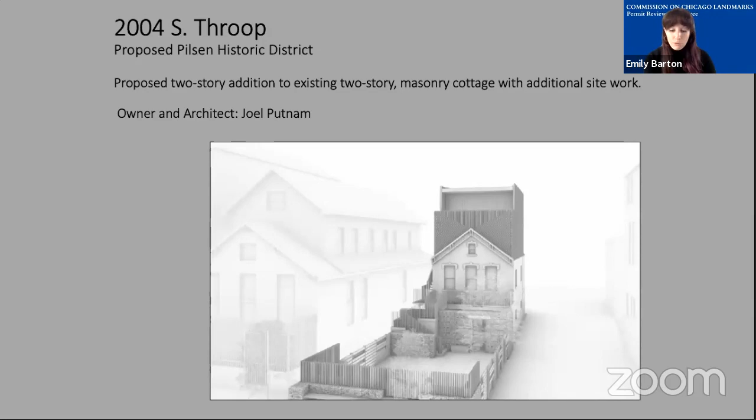So the subject building is a masonry workers' cottage on a 100-foot deep lot. The cottage is set back approximately 60 feet from the front property line and has no rear yard setback. Currently, there are 13 other buildings within the proposed district with a substantial front setback, all of them cottages. In the district designation report, these 13 buildings, along with the subject property, were categorized preliminarily as contributing structures, but that is strictly a preliminary determination by staff, non-binding to the commission.

Pending the final designation of the proposed Pilsen district, the commission intends to draft and adopt design guidelines specific to the district to address the unique characteristics and challenges predominantly found there. We acknowledge the difficulty of trying to expand properties such as this one. At this time, however, staff is only able to evaluate the proposed project pursuant to the Commission's general guidelines and

the U.S. Secretary of the Interior Standards for Rehabilitation. Staff was able to locate a building permit issued on August 16th, 1887 for this address. The 1914 Sanborn map shows a 1-story building with basement in the same location as the current cottage. The 1950 Sanborn map shows a building of the exact same dimensions, materials, and Sanborn notations as the building on

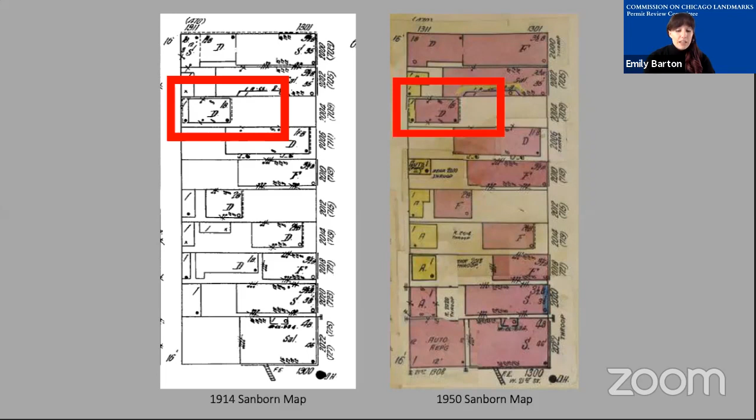the 1914 map, at the rear of the lot. Based on this information, staff believes that the current building was constructed in 1887 and retains its overall scale, footprint, and location on the lot.

As a reminder, the significant features outlined in the final district recommendation are all exterior elevations, including roof lines of buildings visible from the public rights of way. In this case, that primarily means the front elevation and the gable roof line.

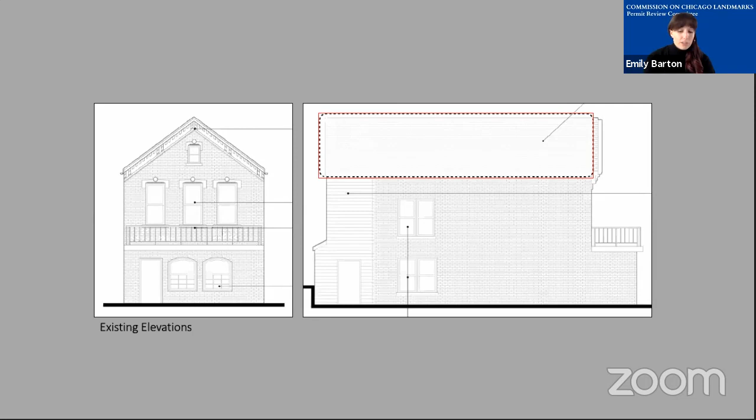The proposed project includes the removal of the existing roof and construction of an approximately 21-foot tall rooftop addition. This would nearly double the height of the existing cottage to approximately 40 feet tall and would be located directly behind the existing brick facade and cornice detailing.

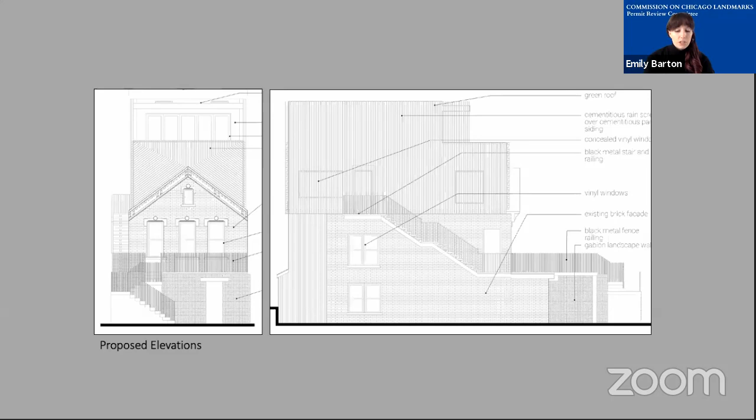This addition is proposed to be constructed primarily of cementitious panel siding covered with a cementitious slatted rain screen. The fourth floor has an 11-foot 4-inch setback and is proposed to be clad in cedar siding. In addition to removing the roof of the existing building, staff assumes that substantial other structural modification will be required to construct the proposed addition atop an 1887 brick cottage.

Here you can see the first and second floor would house 2 rental units, while the upper 2 floors will serve as a home to the applicant. We understand that this proposal also requires either approval from the Zoning Board of Appeals or a rezoning.

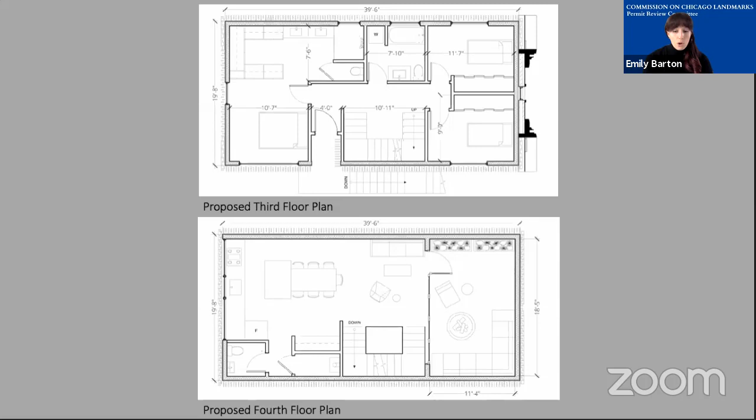The proposed change to the historic building and its roofline, resulting from the substantial structural demolition and construction of the large visible rooftop addition, would destroy the significant historic and architectural features of the building and have an adverse effect on the property and district.

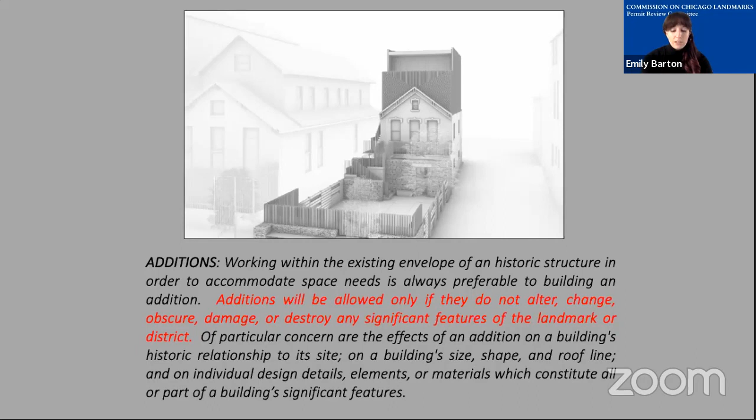It's also contrary to the Commission's guidelines on additions, which state that working within the existing envelope of a historic structure in order to accommodate space needs is always preferable to building an addition. Additions will be allowed only if they do not alter, change, obscure, damage, or destroy any significant features of the landmark or district. Of particular concern are the effects of an addition on a building's historic relationship to its site, on a building's size, shape, and roofline, and on individual design details, elements, or materials which constitute all or part of a building's significant features.

The proposed project would also be contrary to standards 9 and 10 of the U.S. Secretary of the Interior Standards for Rehabilitation, which state that new additions shall not destroy historic materials, shall be compatible in design, and shall be undertaken in such a manner that if removed in the future, the essential form and integrity of the property would remain.

The alteration of the historic roofline and the highly visible addition would destroy character-defining features of the property. Staff believes that the new addition, while differentiated, is not compatible with the massing, size, or scale of the historic cottage. And because the roof is proposed to be removed, if this addition were removed in the future, the essential form and integrity of the property would be impaired.

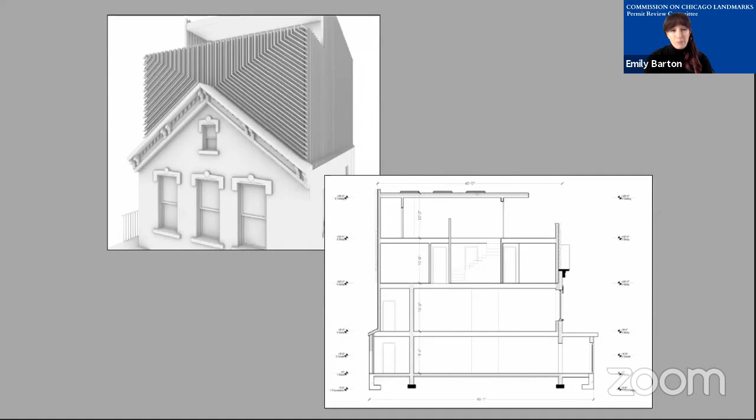Along with the proposed rooftop addition, the applicant is proposing to add a visible solid front stair to the east and south facades and renovate an existing rooftop deck to the top of the non-historic portion of the first floor.

The stair and deck will both be surrounded by a black metal fence railing. Staff recommends that the solid stair should not be approved, as it obscures the cottage facade and is not compatible with the historic and architectural features of the district.

The applicant is also proposing site work in the large front yard of the property: a 9-foot 4-inch tall gabion landscape wall, which is a wirework container filled with rock, broken concrete, or other material, proposed in front of the cottage, which acts as a screen to block the first floor from view and runs nearly the entire width of the approximately 25-foot lot.

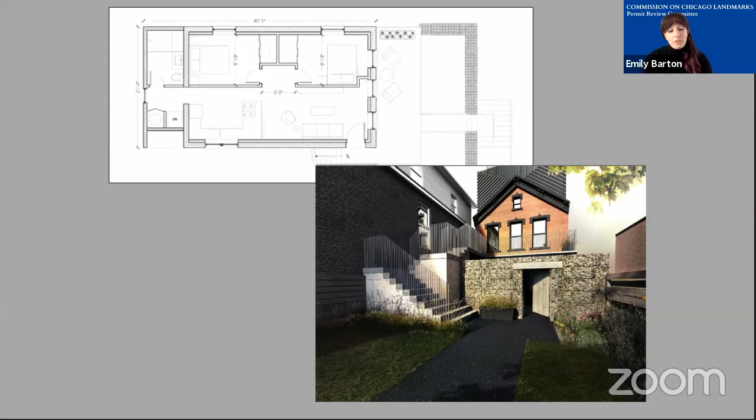A metal fence. Staff recommends that this element obscures historic features of the cottage and is not compatible with the architectural and historic features of the property and district.

So that brings us to our staff recommendations. Staff recommends that the committee find that the proposed project to construct a 2-story addition atop the existing historic building and other proposed alterations does not meet the criteria set forth in the commission's rules and regulations, the commission's guidelines for alterations to historic buildings and new construction, and standards 1, 2, 5, 9, and 10 of the U.S. Secretary of the Interior Standards for Rehabilitation of Historic Buildings.

Therefore, the project would have an adverse effect on the significant historical and architectural features of the proposed property and district. Staff further recommends that the committee advise the applicant consider alternative options to rehabilitate the property that would not destroy and adversely impact the roof line and other historic features of the building, such as a smaller, less visible rooftop addition set back from the front facade.

Pending the final designation of the proposed Pilsen Historic District, the commission intends to draft and adopt design guidelines specific to the district, which address its unique characteristics and challenges. These guidelines should evaluate properties where existing structures are built towards the rear, such that additional options may be considered to accommodate further development of the property.

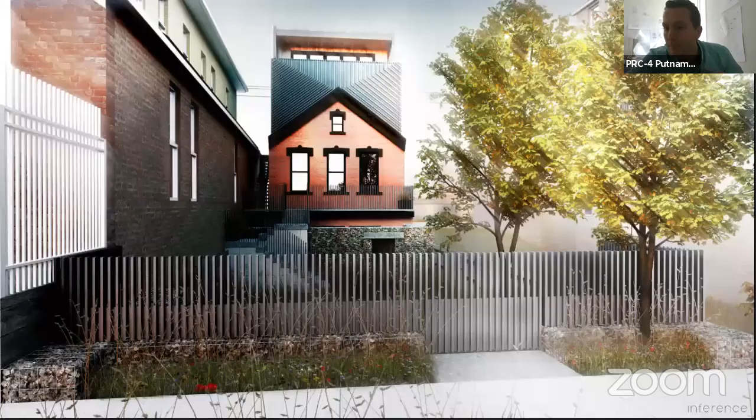In November of 2017, Catherine and I purchased property with the intention to undertake some form of major construction project. Our goal, among them having a long-term family home, has been and will continue to be to maximize the zoning allowances for our property, as well as introducing as many rental units as possible.

Pilsen's facing a housing shortage. Much of the US is facing a housing shortage.

At that time, we reached out to the previous alderman's office, as any work would and will need to go before the zoning department. Alderman Solis's instructions to us were that everyone involved needed to make money, and that because it was an election year, we would need to wait for him to win an election, because he did not want to anger any voters by taking our project to the zoning board. Thankfully, he didn't win. However, shortly after the election, we received a notice of the proposal for the historic district.

And along with attempting to install a city water meter, we have effectively been stuck in a bureaucratic nightmare coming up on 3 years now.

Catherine and I take issue with the CCL staff statement that we're adding 2 stories, when in fact we're only adding 1. We're proposing that the current 3rd floor attic, which is enclosed interior and conditioned space, which prior to our ownership was used as a bedroom, be adjusted to have a continuous full height ceiling.

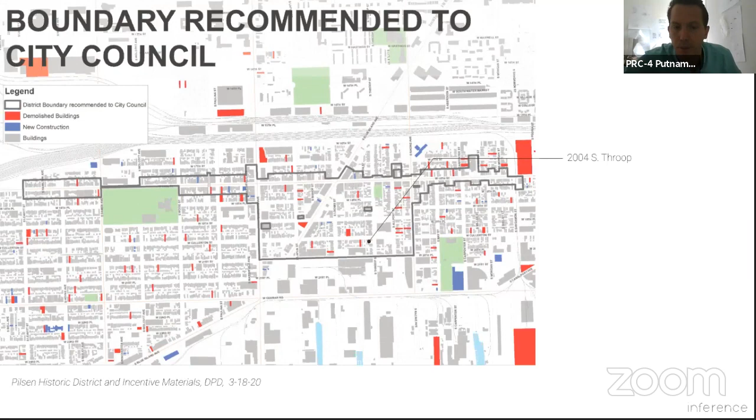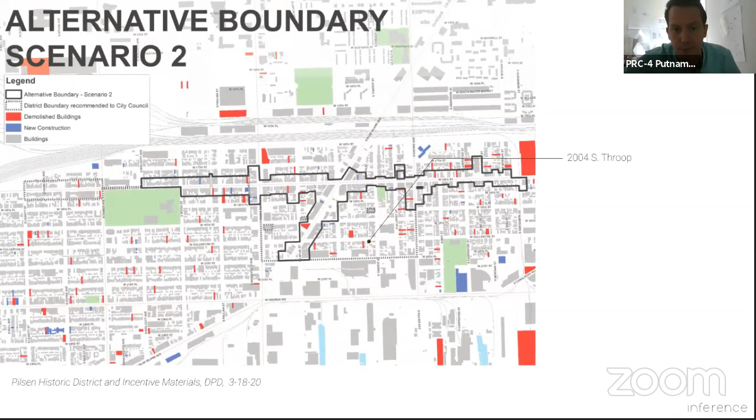Next slide, please. This is another scenario also showing that our house is not in what would potentially be the district.

Through their revised recommendations, the Department of Planning and Development, and the Bureau of Planning, Historic Preservation, and Sustainability have effectively concluded that our house isn't historic. Why would they make revised presentations if our house is historic? Clearly this is an issue that is difficult to even determine where the boundaries are, so we do take issue with the strict, stringent standards being imposed upon us.

Next slide, please. So they acknowledge, and Emily graciously did acknowledge that this is difficult. We've been stuck for several years now, and are simply coming to you because we're trying to move the process along for ourselves, but also for others.

But we're repeatedly told that when it passes, guidelines will be put in place. When it passes, this is a blank check. No one would vote on a law that they didn't have in place or didn't understand before it was even written down, yet this is what we're being asked to do.

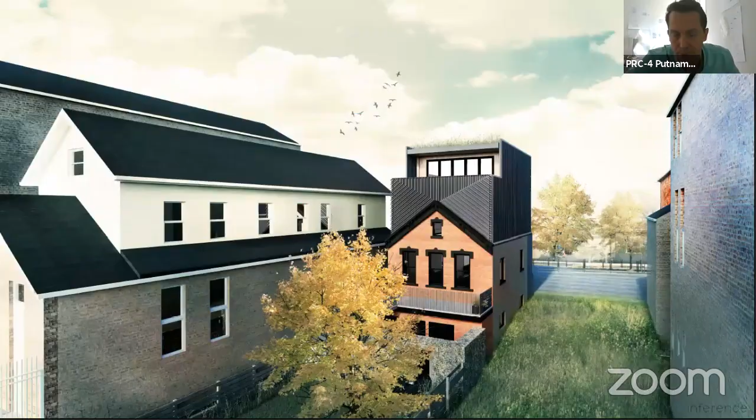Next slide, please. So I want to go through one by one and just talk about each of these.

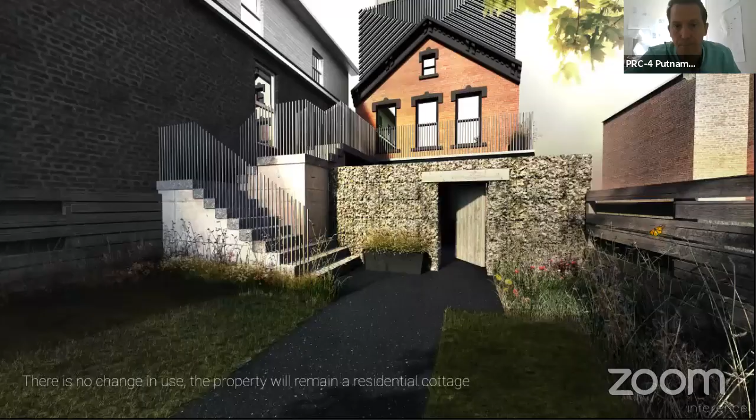So this says that one of the points being made is that we're not using it for its historic purpose. Next slide, please. It will continue to be a home, a workers' cottage.

Next slide, please. The historic character shall be retained and preserved. The removal of historic materials, features, and spaces that characterize the property shall be avoided.

As Emily said, there's an existing brick addition in the front. We're proposing that we screen that through the use of gabions, and the screen is not to screen the building—the portion being obscured is already an addition that is not 'historic'—but to blend the staircase into the building. Most of the time, when you walk through Pilsen, homes set back like this have rather ugly stairs in front. We're trying to find a way to incorporate the stairs into the design of the building in a pleasing way.

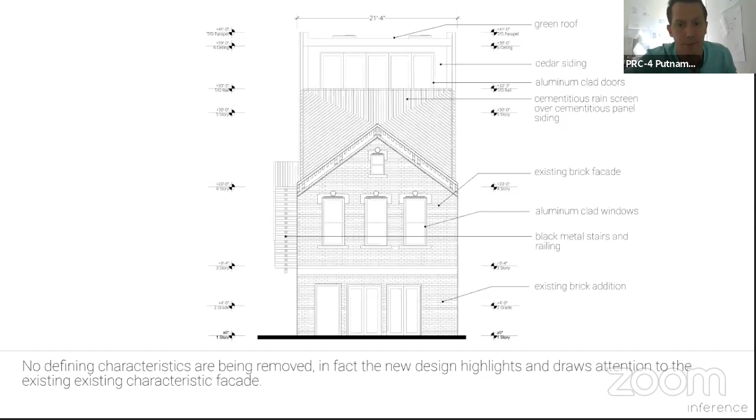Next slide, please. Distinctive features, finishes, construction techniques, or examples of craftsmanship that characterize the property shall be preserved. Next slide, please.

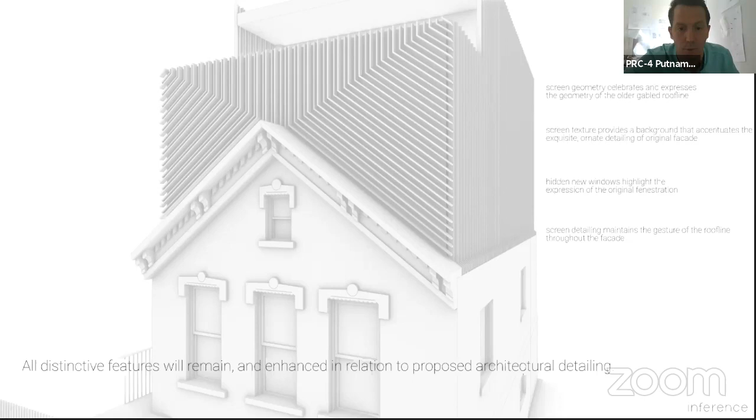We actually feel that we're preserving the distinctive character. It is an old shake roof. Yes, we acknowledge that we're adding to that, but we're celebrating that original design and drawing attention to the most unique features of the home: the cornice, the brickwork, the rose carvings above the window.

Next slide, please. New additions, exterior alterations, or related construction shall not destroy historic materials in such a way. New work shall be differentiated. Next slide, please.

I can't imagine how it's any different—our work is completely different, I acknowledge that. We're not destroying any defining characteristics. The addition has been specifically designed and detailed to be distinct yet harmonious. All new windows and doors will be hidden from view, which will affect the quality of the light in our home, but we think that adding punch windows everywhere would actually detract from the beauty of the old home.

Next slide, please. New additions and adjacent or related new construction shall be undertaken in such a manner that if removed in the future, the essential form and integrity of the historic property and its environment would be unimpaired.

Next slide, please. Emily stated that we would be placing the addition on top of the existing brick structure. That's not true—the brick structure is crumbling and falling down. It would not hold an addition. Furthermore, there are no interior walls; it's lath and plaster over the existing brick. There's no insulation, so we need to provide space for insulation, new plumbing, and new electrical. In addition, we're planning to completely pour new foundations and restructure the entire building internally.

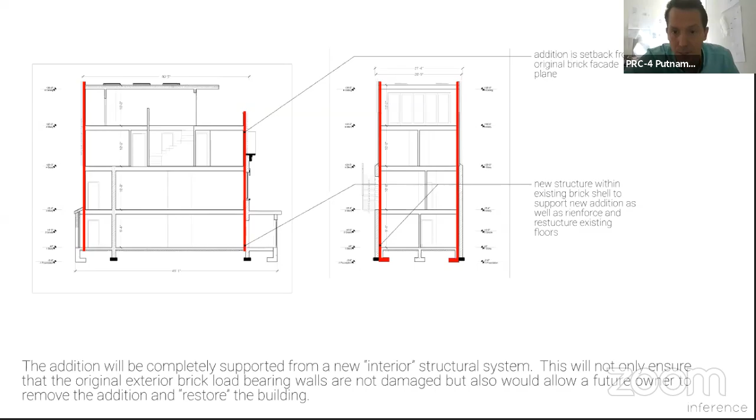So, as I said, we've gone around and we've talked to our neighbors. Everyone loves this. They actually tell us to demolish it. Here's one, is that they welcome positive change. They think it's positive change.

Miguel, he's a good friend. He also doesn't understand why they can't think that this would be a good thing for the community. Miguel owns the building down the street.

Lalo is actually extremely worried about the designation because if strict rules are in place, he may be forced to sell his building. He's lived here 40 years. And he loves what we're doing. He actually told me to demolish it because he thinks it's an eyesore.

Here's one where they think that all of the change is good, not negative. I mean, I don't want to go through all of these one by one, but I think it's important that we hear from the community.

And so Jonathan did send in a letter. As I said, he worked with us. After our initial meetings with staff, I took a step back. I'm an architect, I'm not a preservationist. So I called Jonathan, I asked him to come to the house, walk through it. I showed him our proposal. And we spent days in charrettes arguing over what we thought was appropriate, ultimately arriving at what we've come here with.

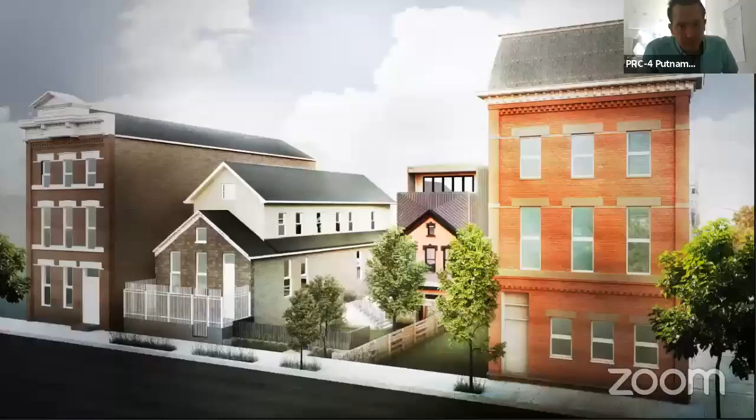The City Council will soon vote on the final outcome of the proposed historic district proposal. The vote very well could end up being a no. And even if it does pass, it would more than likely pass one of the currently proposed alternate boundaries, effectively making our home a non-historic structure. At such time, we would have no clear path forward. We could potentially be required to seek a demolition permit to achieve our needs for the property.

As it stands now, the building currently doesn't conform to any zoning code. Although we recognize that we could continue with this plan and argue for a variance, any new work may need to be the result of strict compliance with zoning ordinances, meaning a new building in the front and parking in the rear. It is our hope that with your support, we can save this structure, but clearly without it, we simply may not be able to.

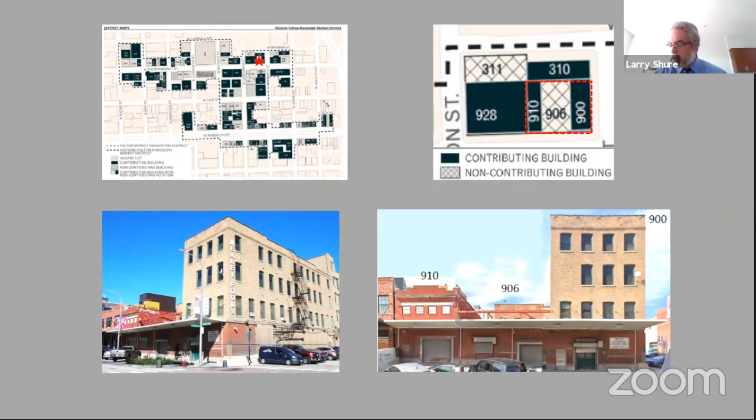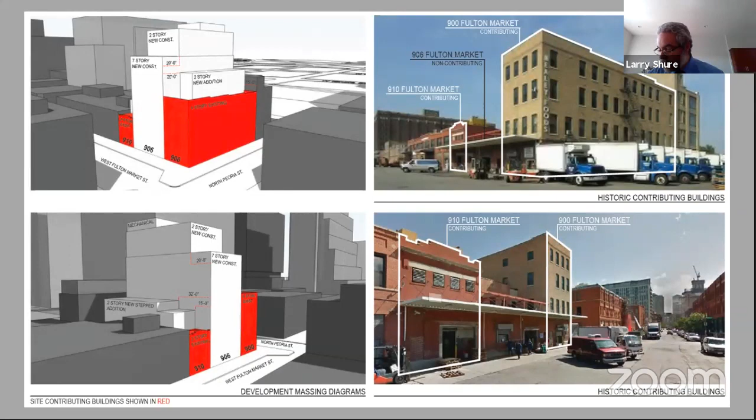Let's go to the next slide. So as you mentioned, the project includes facade restoration and rooftop additions for 900 West Fulton Market and 910 West Fulton Market, both of which were preliminarily identified as contributing. A proposed new 7-story infill construction is intended to replace 906 Fulton Market, the building in the middle. Although these 3 buildings were constructed separately, they have been used as a single complex since at least 1916. The proposal also intends to use these buildings together while maintaining their individual characteristics. In order to accomplish this, this project will require a foundation in common for the entire site, which will result in partial demolition and replacement of the structural systems of the historic building. A similar proposal was approved by the Commission at 1100 West Fulton Market, which maintained a portion of the historic building and then connected to adjacent new construction.

So let's go to the next slide here. We got a lot of slides.

So what we want to talk about first is the determination of whether 906 Fulton Market is contributing or non-contributing. As you know, the report provides a preliminary recommendation, but when someone actually proposes demolition, staff takes a closer look at the individual criteria that allows us to determine if a building is contributing or non-contributing.

I'm not going to go into enormous detail for all this criteria, although I do want to note that your designation report does have all that information if you would like to take a closer look. Criteria 1 and 2 relate to whether the property exhibits the general historic and architectural features as described in the designation ordinance, and those features are generally corbelled brick, cast iron details, elaborate parapets, things along that nature.

It's our recommendation that this building really doesn't exhibit those significant criteria as identified in that ordinance. It's a fairly utilitarian building. It actually consists of two different buildings, in my opinion: the 2-story building, which you can see in this photo, and then kind of a 1-story building that was wrapped around that to create these loading docks along Fulton Market.

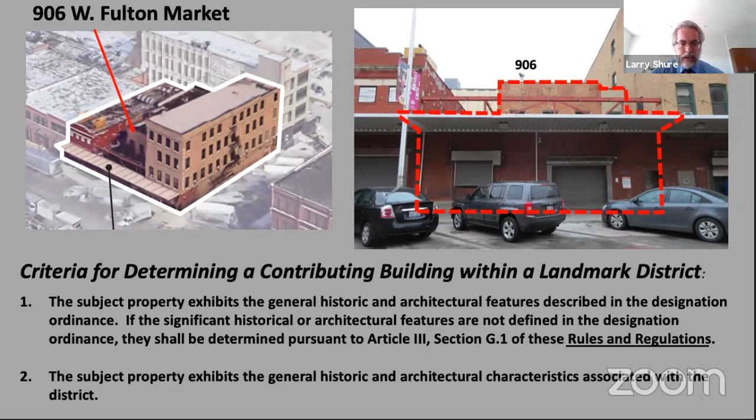Let's go to some more of the criteria on the next slide. So criteria 3, 4, and 5 relate to the general characteristics of buildings within the district. This building does respect the general site characteristics. It does maintain the street wall, and it is consistent with the general scale associated with the district, as well as the materials utilized in the district.

However, the building does exhibit a number of alterations, including a loss of height, whether it's 1 floor or 2, that you can see in the photo of that 2-story building. At some point it lost a floor, and you can still see the different brick that was used to repair that. I also want to mention that although we do have some information about the building, we were not able to identify the original building permit, so we don't really know who designed it or when precisely it was constructed. We're estimating it was built about 1906, but it's difficult to say for sure.

So we are recommending that the commission find this as non-contributing, which would allow it to be demolished and replaced with the proposed infill construction. Let's go to the next slide.

So many slides. First, I'd like to talk about 900 West Fulton Market, which is that corner building. The applicant proposes to restore all window openings along Fulton Market and Peoria, installing compatible new double hung windows. The non-original storefront infill will be removed and a new compatible storefront will be inserted. These will extend up to the historic cast iron lintels, which will remain on the front elevation. Additional storefronts are proposed for the east elevation, and insertion of new storefronts is also supported by the Fulton Randolph Market design guidelines, which I hopefully included in your packet.

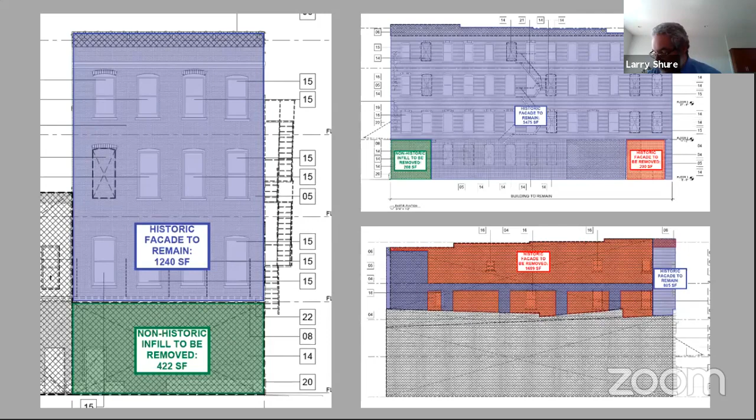Let's go to the next slide. The applicants are proposing to construct a 2-story rooftop addition on 900 Fulton Market. The proposed addition is set back 20 feet from Fulton Market and 15 from Peoria, which is in keeping with the recommended setbacks in the design guidelines for rooftop additions of buildings 4 stories or greater.

The 2-story addition is 22 feet in height, which is compatible with the floor heights of the historic building. The design of the addition utilizes a glass and metal curtain wall with dark colored mullions. The commission has previously approved of new rooftop additions with modern simplified details, which can be clearly differentiated from the historic structure.

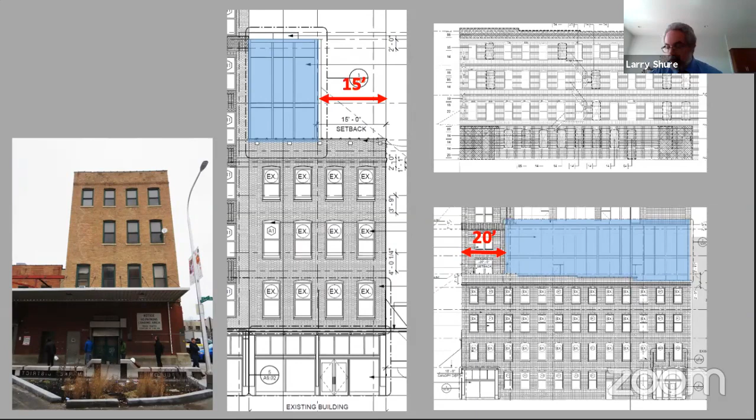Okay, moving on to the next. So this is the two-story building at 910 West Fulton Market. The primary elevation along Fulton Market has been substantially altered, including storefront infill and reduction in the size of the second floor windows. The applicant proposes to install a new compatible storefront system and restore the original window openings at the second floor with new compatible double hung windows. The front facade and parapet will be repaired as needed.

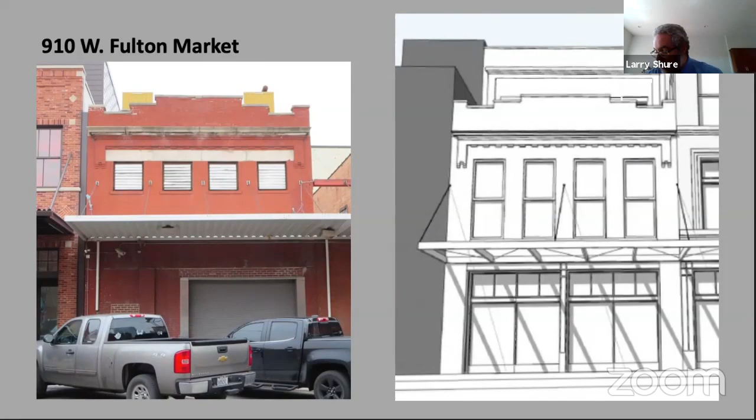However, there is a substantial amount of demolition proposed for this property, and we'll look at that a little bit more on the next slide.

According to the engineer's report, which was included in your packet, a temporary shoring system in the basement is not adequately engineered to support the weight of the building. Cracks in the first floor concrete slab and corroded rebar are visible, and the parapets are tilting outward. The report concludes that 910 West Fulton Market, except for the front facade, is not salvageable and would require replacement. The dilapidated state of the building indicates that it may not survive substantial intervention. Staff did tour the site with the applicant and agrees that the condition is fairly poor.

Let's go to the next slide. We'll talk a little bit more about this.

The applicant is proposing to retain the front facade and 7 feet of the east facade, which you see in these graphics, and those areas will be braced and retained. Due to the structural condition of the building, the remainder of the structure is proposed to be demolished and replaced with new structure.

As I mentioned, if removal equals 40% or more of the significant features, it requires approval from City Council. The applicant has provided graphics indicating what they believe are the portions of visible facade that must be removed, and they came up with a calculation that equals about 36.1%. Staff is a little concerned about this calculation because it depends on particular vantage points to determine the maximum amount of removal. So we recommended that they expand their calculations to include the entire east elevation, and if they did that, it would equal about 55% removal. We are recommending that if that is the case, this would also be approved by City Council along with that middle building.

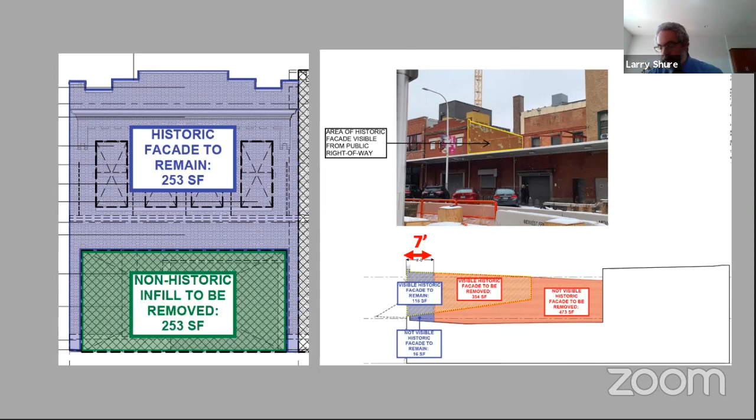Let's go to the next one, yet more exhibits.

The applicants proposed to construct a 2-story addition on the 2-story building at 910 Fulton Market. The design guidelines limit rooftop additions to 1 story for buildings which are 1 to 3 stories in height. To address this, the applicants have set back the 1-story portion of the building 15 feet from the front property line, and set back a proposed second floor 32 feet from that front property line, creating a stepped condition illustrated in the graphic to the left. Additionally, the height of the second floor is significantly less than the established historic floor heights, and the intent was to minimize the visibility of that second floor while providing enough square footage to meet the program needs of the development.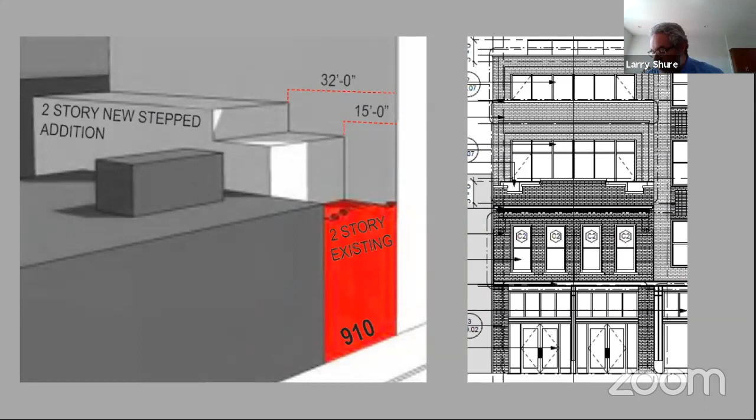The applicants did provide significant amounts of perspective renderings from a number of vantage points to illustrate that the proposal will not result in significantly more visibility than the 1-story addition recommended by the guidelines. So staff is recommending that the additional floor is adequately offset by that increased setback and that it may be approved as proposed. The design of the rooftop addition incorporates brick cladding and a simplified reference to the historic parapet details. Staff recommends that the proposed setback and massing are compatible with the intent of the design guidelines, which is to allow compatible rooftop additions which do not damage or obscure the historic character of the building.

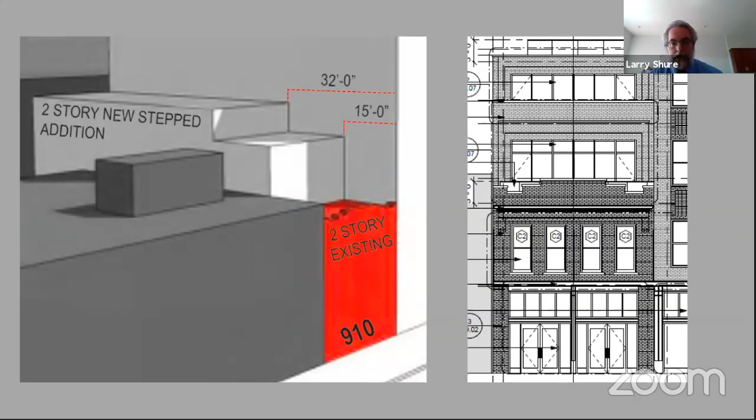Let's go to the next one.

I want to talk a bit about the proposed 9-story infill construction at the location of 906 Fulton Market. The first 7 stories of the building are about 90 feet 10 inches in height, which is compatible with the tallest contributing building in the district at 900 West Lake. The two top floors are set back 20 feet to decrease the visible mass at the front property line. The height of the top 2 stories, 22 feet, brings the total height to 114 feet. Rooftop mechanicals atop the building increase that height to approximately 123 feet.

In June of 2019, the PRC approved a new construction project at 1041, 1043 West Fulton Market. In that case, the 8-story masonry base of the building at 1043 was almost identical to the proposed height of these lower 7 floors, 90 feet, 10 inches. A glass tower was set back 20 feet from Fulton Market for a maximum height of 138 feet. In that case, the proposal covered an entire block within the district and was not immediately adjacent to any historic structures. In this case, the proposal incorporates 2 historic structures, which are significantly smaller in scale.

The proposal is also adjacent to other historic buildings on the block. The design of the proposed building utilizes masonry piers and spandrels with punched openings and paired double hung windows on the upper floors. A corbelled cornice terminates the 7-story portion of the building.

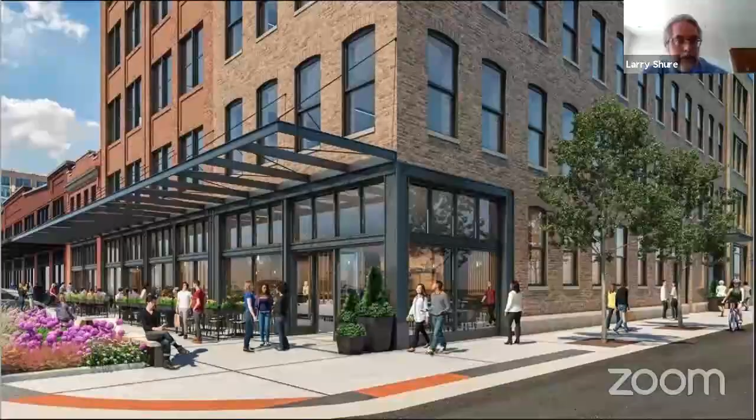In comparison. Oh, you're looking at the comparison report. Yeah, maybe we can go back a couple of slides and look at that rendering. You know what, how about 2 slides forward?

Oh, that one, perfect. Okay, so the current proposal that you're looking at here is the final submittal. The previous one, which I think was included in your packet and I don't think anyone else can see, was a slightly different proposal with a slightly different treatment of the brick and of the upper portion of the building. Staff had some concerns that the building should read as more of an individual building rather than as a building that's had an addition put onto it. And then there was some concern about breaking up the massing to be a little more compatible with the historic character of the district.

Is that what you're focusing on? Yeah, correct. I just wanted clarification on that because it significantly increased the amount of brick material, which contributes to a much more integrated aesthetic integration of the addition with the existing building in the foreground. So I just wanted to acknowledge that there was already a significant revision of this. I want to say that we've worked on this project with the applicants for about 6 months, and they've done an extraordinary job of incorporating our comments into the submittal. Yeah, I wanted to bring attention to that effort. Thank you.

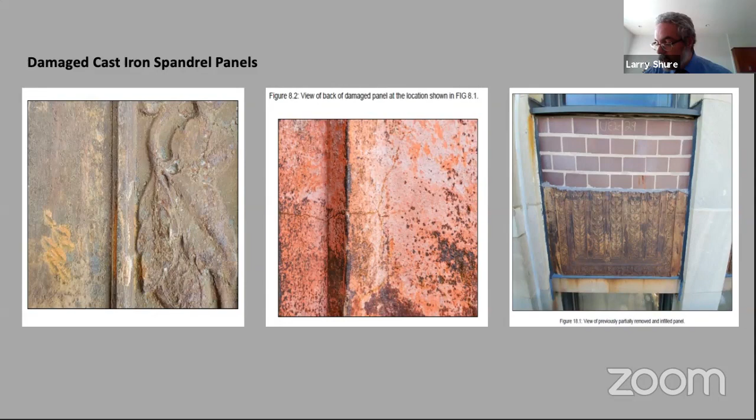A number of panels had previously been removed, some partially cut to accommodate through-wall air conditioning units, with resulting voids often infilled with dark brown brick. In some cases, visible structural repairs to the panels had been performed. Many panels have missing corners due to fractures within the material or corrosion related to the underlying steel angles. Much of this corrosion is due to failure of the perimeter spandrel sealant joints and failed paint coatings.

Based on their survey, KGH determined that more than 60% of the panels are not salvageable. This was primarily a visual survey, although some panels were removed for a more thorough inspection. In some cases, panels which appeared solid revealed fractures and hairline cracks on the back, which were not readily apparent on the front.

Here we go. The process of removal irreparably damages these cast iron panels. They appear to have been installed from the interior of the building with J-hooks prior to installation of the building's backup masonry, which was then infilled from above. They cannot be removed intact without removal of the adjacent limestone cladding or creating access through the openings in the interior walls. Attempts to remove the panels intact did result in additional fractures.

Historic preservation guidelines state that when deteriorated ornamental features cannot be repaired, they may be replaced to match the old in design, color, texture, and overall visual qualities, and where possible, materials. While cast iron or even cast aluminum would be the most appropriate from a historic standpoint, the original method of attachment requires substantial removal of limestone cladding and brick backup in order to access those backside connections necessary to support the weight of any cast metal. The applicant notes that shoring of the window assemblies might also be needed to allow reinstallation of the heavy metal panels.

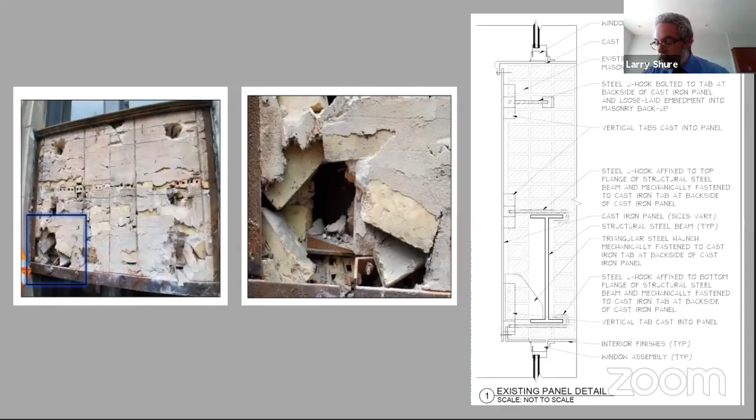Substantially adding to the complexity of the project. Rather than wholesale removal of adjacent historic materials, the applicant proposes a lighter alternative, which could be securely installed without major reconstruction. That alternative is fiber reinforced polymer. Let's go to the next slide.

The commission has approved of fiber reinforced polymer, or FRP, as a replacement material on various landmark projects. Most recently, FRP was permitted to replicate the missing terracotta cornice at 226 West Jackson. FRP has also been approved as a replacement for the Joliet limestone spire at the First Baptist Congregational Church. FRP molds can be taken from existing features, or a model can be built to replicate historic features, and a mold can be taken from that.

The current proposal represents the first request for large-scale replacement of cast iron with FRP replications. This material is relatively lightweight compared to cast metal, but the primary advantage comes from the flexibility in the connections needed to securely attach the lighter panels to the building structure. FRP panels would minimize the impact of new connections on the existing structural frame and limit the extent of backup brick masonry repair work or resetting of limestone masonry cladding. The use of FRP also reduces the risk of future catastrophic failure due to spalling or fracturing.

These cast iron spandrels begin above the 4th floor on the north elevation and the 6th floor on the east elevation, which is 45 feet and 65 feet above grade, respectively. At that height, it will be difficult to identify these as a replacement material.

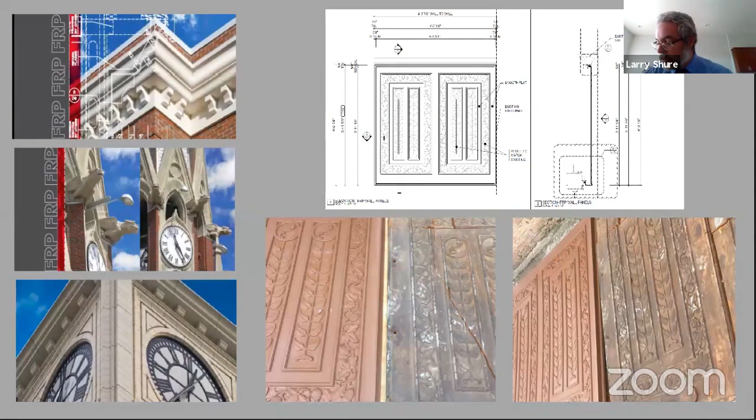Let's go to the last slide. FRP panels may be painted to match the color of cast iron spandrels. Just like cast iron, all panels are intended to be painted, which will further protect the material. The panels will need to be repainted periodically, but this is also true for cast iron. Because the color of the panels will greatly impact the appearance of the building, staff recommends that the historic color be investigated by a qualified expert and that the permit plans incorporate their recommendation into the color choice, subject to staff review and approval. We are recommending approval with those two conditions.

That concludes my presentation. If you have questions for me, and I know that the applicants are on the call as well.

Thank you, Larry. Does the committee have any questions of Larry at this time?

It's a great building. I used to have my office there, and then Millennium Park got built and rent got too high. Anyway, okay, wonderful.

The applicant is here. They want to say anything?

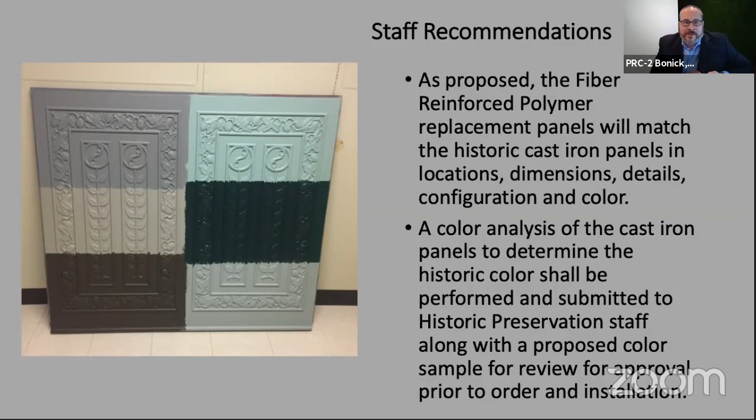Hi, yes, this is Mike Bonick from Kellermeyer Gottfried Hart. I'm the architect and engineer on the project. I think Larry summarized things really well. I just want to start by saying thanks to Larry and the staff for their help and all their time along the way. Also for Ward Miller and his comments at the start of the call.

Larry summarized things really well. I think the issue I really want to hone in on is that as a professional and expert with these materials, KGH can't recommend salvaging any of the panels, not even one of them, in our opinion, based on the way they're attached and the inherent brittleness of the material. We haven't been able to review the backside of all these panels, but those that we have, we're finding deficiencies that aren't detectable from the outside.

We've also worked with a couple of laboratories to try to determine other testing methods to find any panels, or find any testing method that doesn't require removal of the panels and can accurately detect all the deficiencies. The problem is, most importantly, that when there's a crack in a panel, a deficiency, the result is something that falls to the sidewalk. So there's really no in between, and it's usually not detectable to find that pattern when it's actually going to happen. So there's nothing we can do ahead of time to identify these deficiencies and prevent them.

I do want to mention that we got a letter of support for this project, both from the alderman and from the community group. I don't think we received those in time to go in your packet, but I believe they were posted on the commission website. As mentioned, this is a new mixed-use 4-story masonry building with roof deck and attached rear garage with roof deck. The Armitage Halsted Historic District was designated in 2003 and contains one of Chicago's finest intact collections of small-scale 19th century commercial architecture.

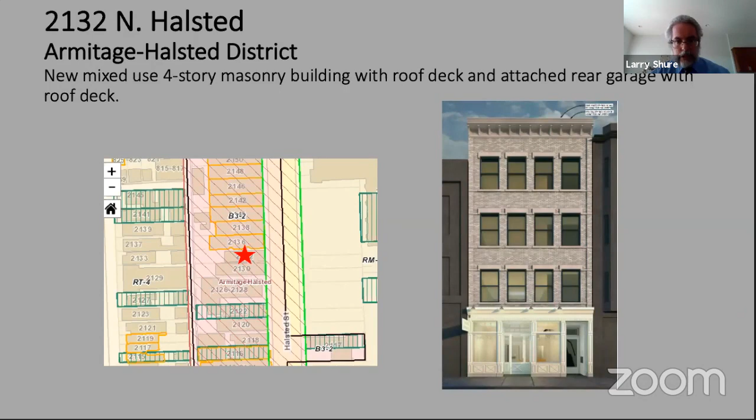Some of you commissioners may recall that the commission approved a demolition of a non-contributing building on this same site back in 2019, and this structure is the proposed replacement. I believe that was a 1-story building that had been a liquor store for a long time. So let's go to the next slide.

As we do for all proposed infill construction, we request that the applicant provide streetscapes and site block plans so that we can look at the proposed building and determine if it's compatible with the existing characteristics of adjacent buildings. In this case, the building is maintaining the existing street wall, and it also has a 0 lot line condition, which is consistent with the historic buildings as well. Additionally, the height is quite compatible with the other historic buildings up and down that block.

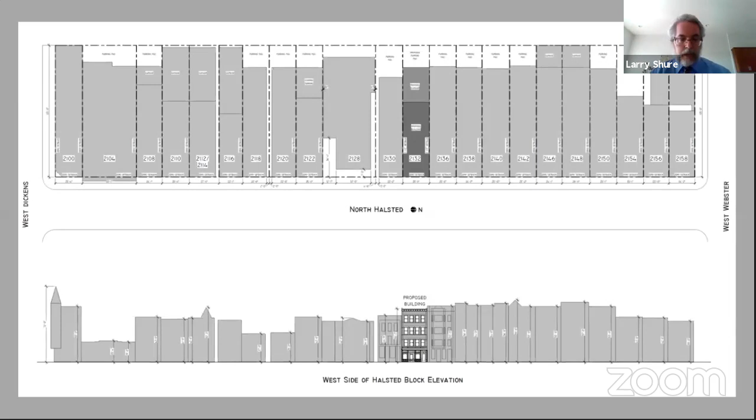We've got one more streetscape. Let's go to the next slide. The applicant provided a rendering of the proposed building just to show how it relates to the adjacent construction in regard to color, material, and overall look and feel.

Let's go to the next slide. The proposed 4-story building incorporates punched window openings, a first floor storefront, and a projecting cornice at the front parapet. The floor heights and window sizes are compatible with the adjacent historic buildings, particularly the building to the north.

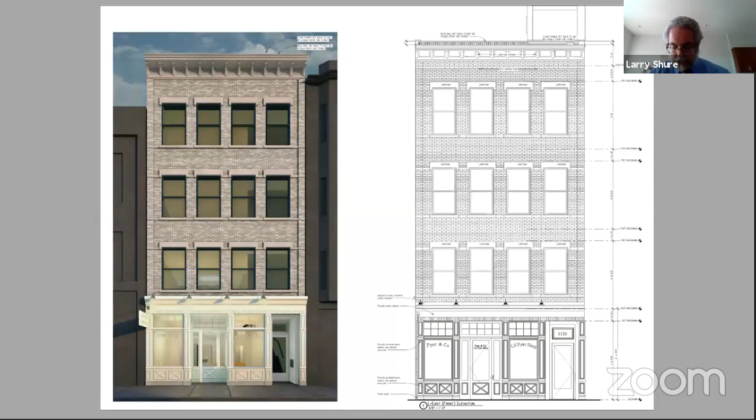Let's go to the next slide. Moving right along, the storefront spans the height of the first floor and utilizes transom windows with divided lights and decorative bulkhead panels. This is compatible with the adjacent historic storefronts.

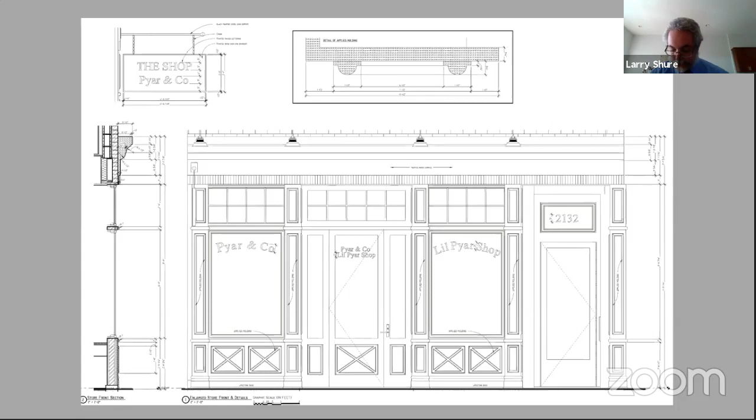Applicants have also shown proposed signage on this submittal, including 3-inch and 6-inch high letters attached to the storefront windows and a non-illuminated blade sign about 2 feet in height and 4.5 feet in length. Staff recommends that the signage be approved in concept, and signage details shall be reviewed and approved with the sign permit applications. Let's move on to the side elevations.

They are proposing to construct a rooftop stair enclosure to provide access to a roof deck. This enclosure is set back from the front facade 16.5 feet. It's about 8 feet in width, and it projects above the front parapet by approximately 5 feet. The stair enclosure utilizes a sloped roof to match the slope of the stairs in order to decrease its visibility.

The stair enclosure will have a dark, non-reflective fiber cement cladding. The metal railing for that roof deck is set back about 5.5 feet and projects only about 6 inches above the front parapet and will not be visible from the public right-of-way.

I also want to mention that what the applicants have proposed is a brick wrap around the sides of that building to screen any views there might be of the proposed concrete masonry units, which they're utilizing for the non-visible elevations. They've also shown face brick for the south parapet of the area of the building that contains that roof deck. The CMU is proposed to have an integral color to match the color of that face brick.

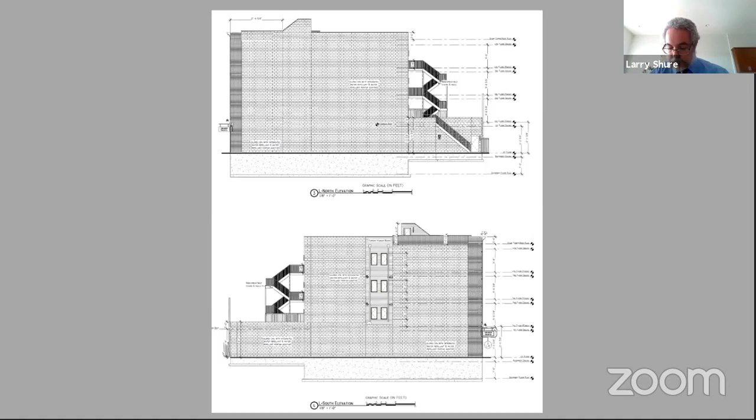Let's go to the next one where they provided some product information and colors and textures of what they would like to use. Obviously, this is the point in the meeting when I would pass around a material board, which sadly I can't do. So these are the proposed materials, the limestone and brick, and staff is recommending approval of these as well.

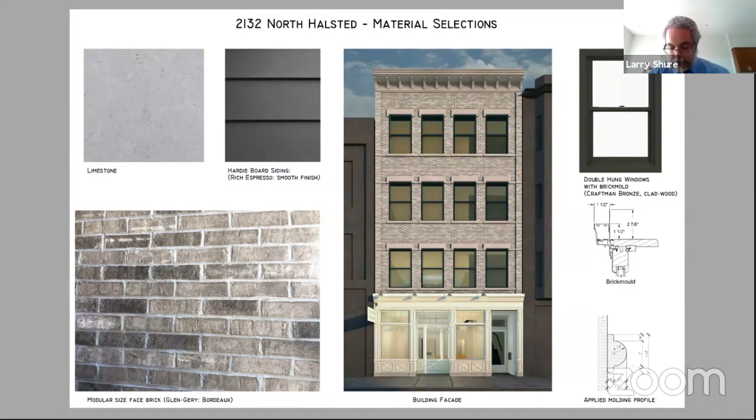Let's just go to the last slide. This is our recommended conditions of approval, which I pretty much touched on, and they're mostly proposed anyway. That kind of is it for this. If you guys have questions about my presentation, I'd be glad to address those. I believe the applicants are here as well.

Thanks so much, Larry. Does the committee have any questions of Larry at this time? Everything's clear, seems to be pretty good here. The applicant is here if you'd like to make a statement.

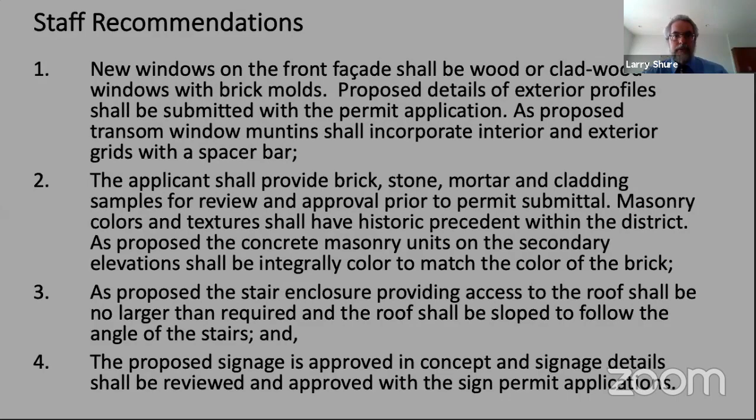Hi, can everyone hear me? Yes. Oh, okay. Just wanted to thank the committee for working through this process with us. We appreciate all the conversations. A lot of people put a lot of time into this process, so just wanted to thank everyone for their time and appreciate the help.

Thank you. Does the committee have any questions for the owner? Seeing none, okay, let me call for a motion to approve the staff recommendations. Anybody want to move? So moved. Commissioner Jakiewicz, and a second. Second by Osmond.

Commissioner Hughes. Yes. Commissioner Aguirre. Yes. Commissioner Jakiewicz. Yes. Commissioner Osmond. Yes. And I'm in favor as well, Commissioner Wong. The motion carries unanimously. All right, good luck, Mr. McKinnon.

And let's go on to the next one. The next one is through that we're done with. The property located at 2314 North Cambridge. This is in the Mid-North District, proposed new fourth floor addition and roof deck atop an existing 3-story single family home.

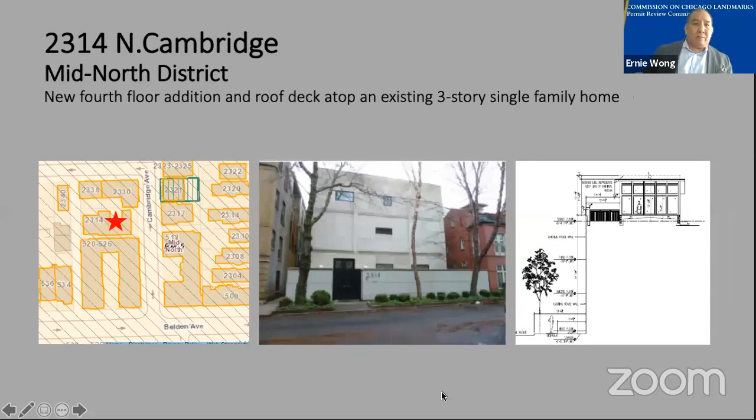There, you got this one too. I do, thank you, Mr. Chairman. So the Mid-North Historic, oh, before I start, I do want to mention we have letters of support for this as well. I think one was included in your packet, and then one was posted earlier this week. The Mid-North Historic District was designated in 1977 as an example of a typical Chicago residential neighborhood at the end of the 19th century, containing excellent examples of building types and architectural styles that predominated when Chicago was rebuilding itself after the fire of 1871.

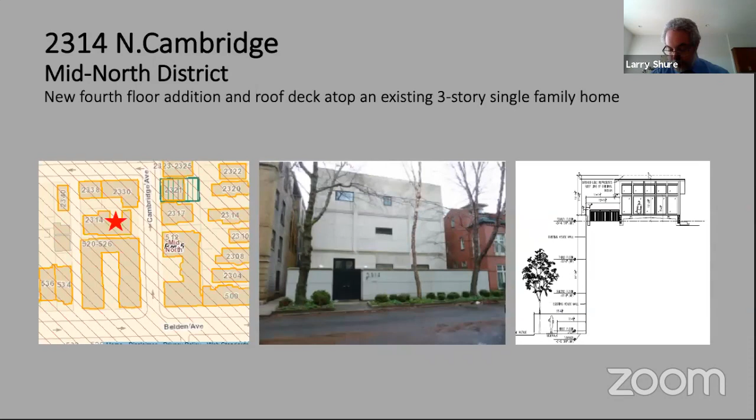I should mention that this is not one of those buildings. So the proposed rooftop addition is 21 feet 3 inches in length and 25 feet in depth. It is set back from the east, or the Cambridge parapet, approximately 14 feet, and from the south parapet about 1.5 feet. On the east side of the rooftop addition, the applicant proposes to construct a roof deck.

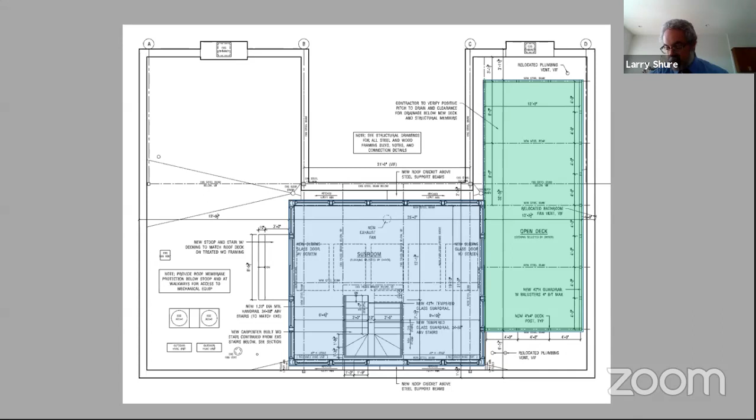The deck is approximately 32 feet in length and 16 feet in depth. The east railing is set back 1 foot 8 inches from the east parapet, 4 feet from the north, and 6 feet from the south. The height of the safety railings extends about 1.5 feet above that east parapet.

When we review rooftop additions like this, we have to determine if they will be visible from within the district, and typically we do that through a mock-up. This came in as a permit, and staff was concerned that this would in fact be visible from within the district. It has a shed roof configuration, with the lowest point about 8 feet on the south end, sloping up to about 11 feet 4 inches on the north. The sloped roof contains 5 skylights, and the base of the structure is fiber cement panel with stucco texture, with walls utilizing aluminum mullions and fiber cement trim.

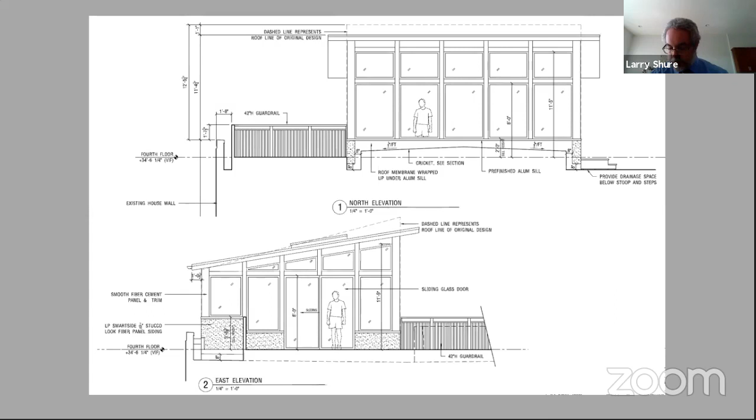So we are recommending approval of this because even though it is somewhat visible, we feel that it does not adversely impact the district. That's really what we're looking at when we evaluate changes to non-contributing buildings. That is it for my presentation. I believe the applicants are on the call as well if you have questions for them.

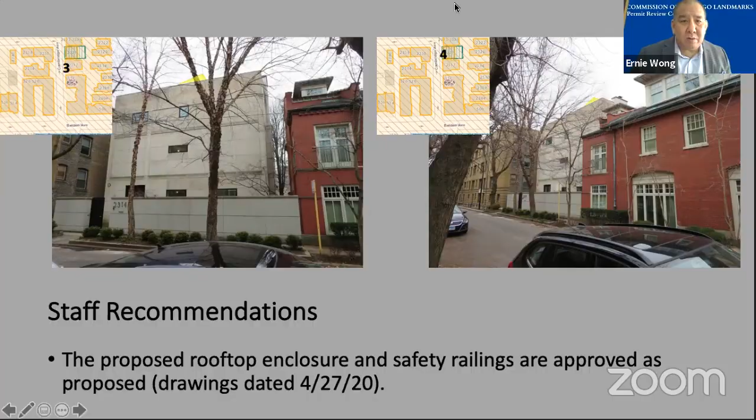Mr. Andrew? Oh yes, no, I really don't have anything to add to the presentation. Just thanks to Larry for reviewing this, and we're excited to move forward with the project.

Okay, great. Does the committee have any questions for the owner? If not, I'd like to call for a motion to approve the staff recommendation.

I move to approve the staff recommendation, Commissioner Osmann. And a second? Second. Commissioner Gary with a second? Or is that Commissioner Hughes? I'm sorry, Commissioner Gary. Okay, Commissioner Jakivich, I approve. Commissioner Hughes, I approve. Commissioner Osmann, I approve. Commissioner Gary, yes. We are unanimous with this.

Good luck, Mr. Andrew, and we'll get this thing going too. Thanks so much. All right.

Last project is the property located at 560 West Fullerton in the Mid-North District. This is a proposed insertion of a new garage into a street-facing elevation and new curb cut. And Emily, you're taking us home here.

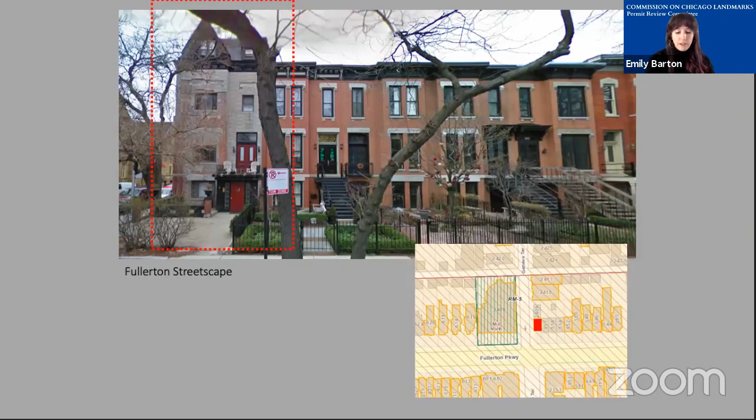560 West Fullerton is the westernmost of 5 row houses along Fullerton, and the subject lot and building doesn't have alley access. It's approximately 20 feet by 63 feet, a corner lot with no rear or side yards, blocked in by buildings on both sides. This is not a unique condition within the Mid-North District—there are at least 5 other similar conditions where buildings do not have access to an alley.

The applicant is proposing to insert an approximately 7-foot tall by 10-foot wide garage door into the first floor of the west elevation of the existing row house. While not the front facade, the west elevation is still a primary elevation facing Geneva Terrace with no side yard setback. This portion of the first floor currently houses a kitchen, bathroom, and interior stair. The applicant proposes to demolish the interior partitions and create a new 1-car garage space.

Similar to the front facade, the Geneva Terrace elevation is clad with face brick and features the same decorative cornice and articulated roofline. Based on research, staff has determined that even though changes to the building have occurred over the years, no evidence exists that a garage door opening ever existed on this elevation.

Sanborn maps of the property show that there was originally a projecting bay similar to the bay on the adjacent building.

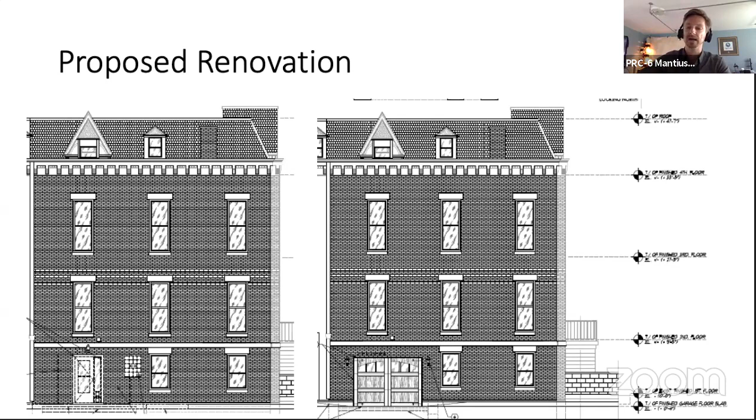If we can continue to the next slide, Emily did mention that there were a handful of other properties on corner lots that could potentially have a garage entrance. However, from the properties I've researched, most of the ones on Geneva Terrace are directly in my area, as well as the two on Belden Avenue.

Lakeshore Drive and North State Street, as Emily rightfully pointed out, are not in the Mid-North District, but I wanted to call out the clarifications to show you, in my wonderful 44-page document that probably makes for good nighttime sleep, a couple additional photos of what other properties on corner lots have.

If we can continue to the next slide, the commission calls out guidelines for new curb cuts, which is something I'm absolutely taking into consideration.

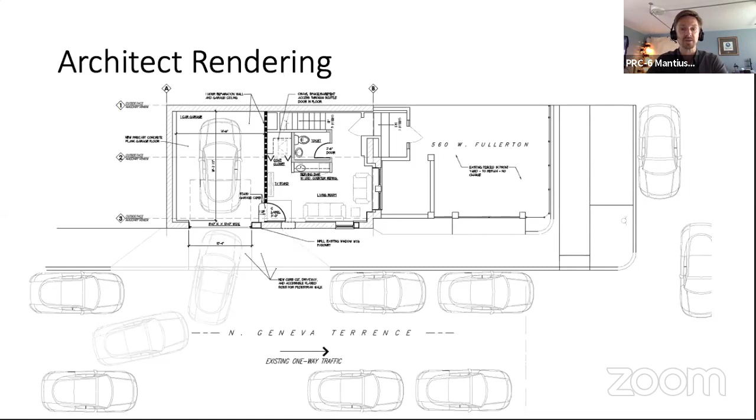Back to the architect rendering, you can see Geneva Terrace Street is relatively narrow. However, with the proposed curb cut, it's possible to ingress and egress. If we can go back one slide, take a look at that curb cut - it's not much more than 9 or 10 feet, maybe 12 feet at its widest. It's certainly not 24 feet.

So if that's something we can negotiate, you can see there's at least 1, 2, 3, 4, 5, 6, probably about 8 cars. The Greystone has a 4 or 5 car parking lot behind it, plus the 4 next to mine - at least 8 cars that don't seem to have any problems entering and exiting that narrow driveway. None of their cars seem to have gigantic scratches on the side, so they're definitely able to get in and out of that alleyway.

If we can continue 2 more slides forward, I'd like to go to the Secretary of the Interior Preservation Guidelines. These came directly from their website. I will absolutely not do anything underneath the not recommended column - it's not my intent to do anything like that. As stated, no actions underneath the not recommended column will be performed.

Streets don't need widening, and all of your lovely faces are covering the video screen sharing. Parking areas will not be negatively impacted, looking from a neighborhood precedent with additional curb cuts that have already been either granted or that exist.

I'd also furnish additional limestone around the garage. I'd add light fixtures next to the garage to light the public walkway. Additionally, the sidewalk would be made a little more safe, especially for those in wheelchairs, or people with strollers trying to walk by the garbage cans - always a pain with a double wide stroller or a wheelchair. Nonetheless, my goal, again, is not to take away any open space, and in fact the public sidewalks could be made more safe by this.

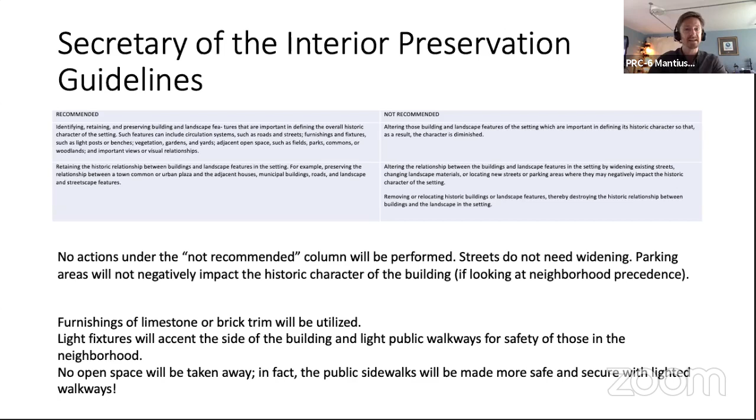558 Belden, which is the comp I'm referring to, has incorporated multiple colors, materials, and historic relationships with the neighborhood. A simple view of the add-on makes it stick out and show clear delineation between new and old. It looks good, in my opinion. I've argued before that maybe it doesn't look good, but if you truly just go by the recommendations, you can clearly tell that 558 Belden has the original white building with stucco stuck on it, but the add-on is a clear delineation, which I like as well.

Additionally, 560 West Fullerton's proposed garage add-on could be muted with minimal separation between old and new, while still maintaining the minimalist west side elevation. The garage is a repurposement of the existing openings, as I mentioned, and with minor modifications we can do it in a very unobtrusive manner.

Additionally, we could make a variety of garage door designs. We can make them look modern, or we could make them look more historic. I'll leave that up as absolutely something that I'm willing to work with you all on.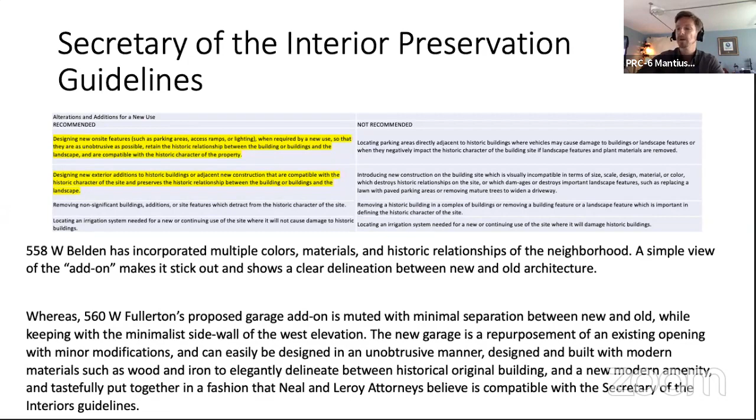So if we can continue on to the next slide, I've just got some rebuttals for points 2, 3, and 9 that Emily had called out.

On the next slide, the historic character of the property will be retained and preserved. My rebuttal is that I strongly believe, and I hope that I can convince all of you, that my architect renderings do show that the property will be retained and preserved. Additionally, if all the brick on the front and new windows are added to the front and side, that building will look top notch. Additionally, no distinct materials will be removed. In fact, original materials like the limestone header there would be repaired.

If we can continue on to the next slide. Point number 3, each property will be recognized as a physical record of its time, place, and use. Again, with that standard, no changes will be made, in my opinion, that could adversely affect the building. It would be repurposing 2 openings with the deteriorated wood door that's currently there and the glass block that are not characteristic. Depending on how you want to interpret it, the garage is not necessarily an addition or a conjectural feature, but an improvement on existing openings in the facade.

The next slide calls out the last standard: new additions, interior and exterior alterations, or related new construction will not destroy historic materials, features, and spatial relationships that characterize the property. This one goes into a lot of depth, and I just called out a handful of bullet points. Last year, I submitted a brick masonry report that calls out evidence I've provided that the standard is maintained. The ground level of the property has no visible historic materials that can be salvaged, let alone destroyed.

Yeah, the whole thing would be redone. The front and the side would be completely done with new windows as outlined on the fourth screen. In the lower right-hand corner, all of the brick you're currently looking at on my building, the first outer wythe would be redone, and any brick that's there would be reused if it's in sufficient condition - I'd let an expert determine that. But yeah, absolutely, I'm not just looking at putting a little garage there. This is the full project: west elevation, south elevation, new windows, and brand new capstones.

I understand, got it. I would just like to reiterate two things quickly. One, that the permit for that work has been issued - it's good to go, we've got windows approved, etc. The second being, I think it's important to remember that this could really set a precedent for dozens more curb cuts and garages into houses. Mid-North and Arlington Deming right north are characterized by these strange streets sometimes, and definitely by these corner buildings that are on both sides. I just want that to be considered.

You're muted, I think, Ernie.

Thank you, Commissioner Hughes. I think I was on mute too. Thank you, Commissioner Wong. My comments were actually echoing some of Commissioner Yankovic's comments as well.

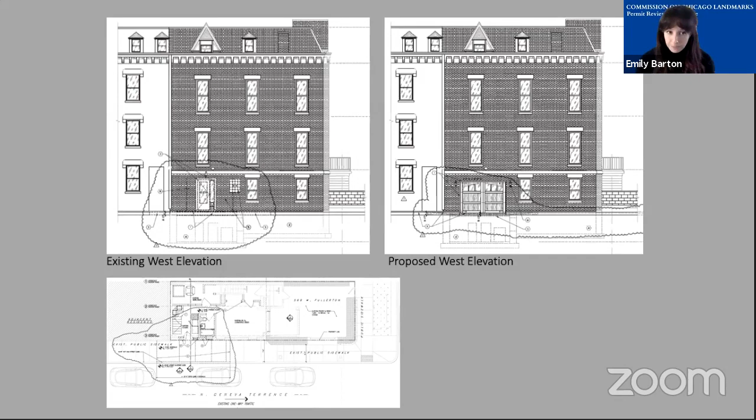If I'm not incorrect, that was one of the concerns. Another concern again was precedent, because she is the alderman for that whole area. And it's great to have the building restored, but it almost feels like it's bargaining a little bit.

They had multiple community meetings with Park West and Mid North, who also, as Andreas said, just couldn't come to a decision. And initially that's what they said too, but they changed their mind at the last minute.

Commissioner Aguirre. Commissioner Aguirre? Sorry, no, I wasn't raising my hand. Okay, oh, I didn't put it down. Sorry. Commissioner Dziekiewicz.

I was making a separate comment, I'm not sure if this is going to get passed or not, but if you could go back to the elevation really quick.

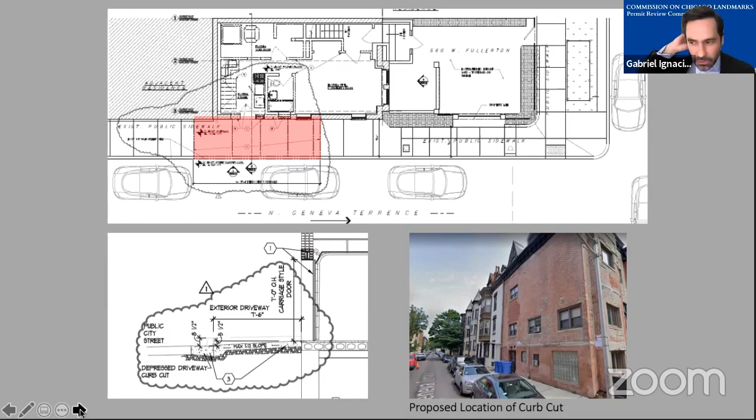So this elevation, in either version, bugs me with the door or with the garage, just because you have kind of a gable at the top. So regardless, I think you want to take those windows right underneath there and try to line those up.

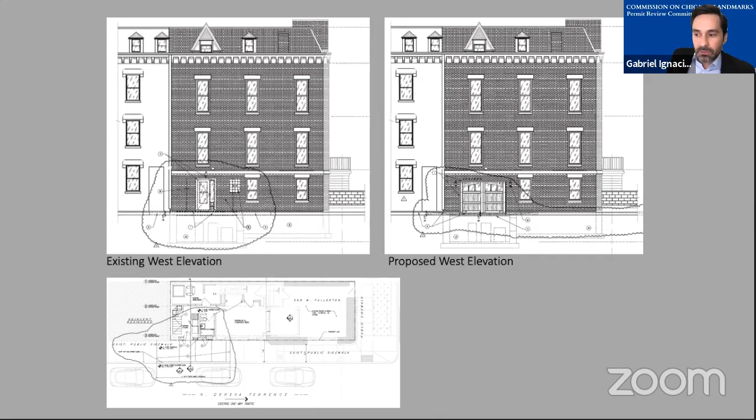That may go to Commissioner Aguirre's comments earlier about things not quite lining up. But if you look at the 3D view as well, I believe in the Sanborn map there looked like there was a 3-dimensional bay that was actually projecting out. Am I wrong about that? So it looked like at one point that's the same building, correct?

Yeah, so that's the bay that we were referring to, on the second and third floors there, like the neighboring building right there. And there's no historic photographs of that, unfortunately, right? I have scoured the entire internet for pictures of this building, and I think it would be amazing if somehow we could find out how to reconstruct that as part of this.

But if you find those, please send them to me. I love having documentation of all historical stuff. My girlfriend's parents live in a historical building, and they've got the original photos from the 1920s of their house, and it gives me goosebumps seeing the original build and original design.

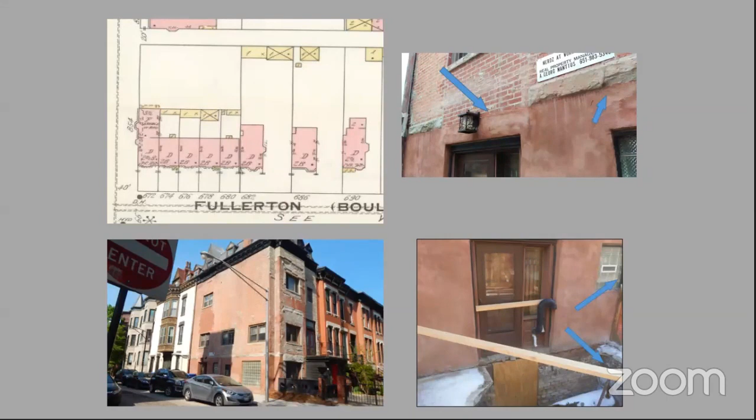Sorry, I think depending on what our motion is today, we can request—the owner sounded like he was pretty flexible in saying he will shift the door or aesthetically make alterations to fit the aesthetic needs of keeping with the historic fabric of the building. So I think the design right now needs a little bit of work, but I don't think he's opposed to any of that. Excuse me for speaking for you, you can chime in. No, just bluntly, if I get the garage door, I'm flexible on everything.

All right, here's our moment of truth, folks, because we've been talking about this and I think it's been interesting to discuss. Does anybody want to put forth a motion that is different from the staff recommendation? Put that out there.

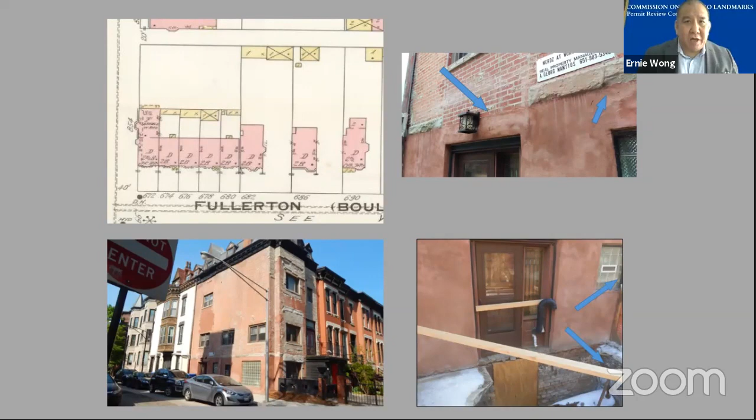I would like to put forward a motion to, in this particular case, accept the owner putting in a garage door, one-car garage door on the side facade of this structure, and continuing to work with the commission throughout their rehabilitation process to get it to aesthetically speak to the historic fabric of this building. Is there a second to that? I second.

Commissioner Dziekiewicz: I accept the motion, but maybe add—obviously that would mean we would get to review it again, because part of what makes it attractive is figuring out a solution for the garbage cans. So really seeing that solution would be important. I agree, I just want to make a quick comment. I think the design needs to be significantly improved. Commissioner Dziekiewicz already mentioned there are attributes to the building that could be more strongly incorporated. So I will support that.

Okay, with recommendations, got it. Commissioner Hughes, I believe that's what you meant anyway with your motion. Yes, that is correct. There was a motion and a second. I'm going to do roll call.

Commissioner Osman: So will we see this again? Because I just feel like we really want to see—we can make that garbage cans part of the requirement. I think it's got to be part of the requirement.